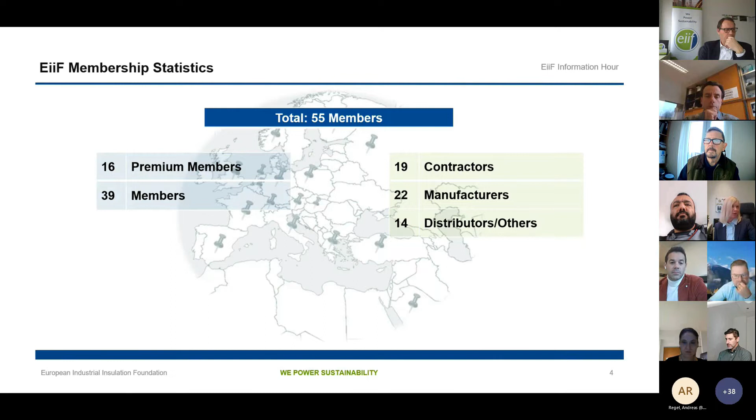Thank you, Minna. I will make it not too long, but especially for newcomers, maybe it's a good idea to go a little bit into the setup, why we are here and what is our purpose. The EiiF was founded about, I think, 12 years ago, on the idea to get this group that Minna just showed, with contractors, manufacturers and distributors, together in one organization, and with that get a voice also in Brussels and give support for the national associations. So that is basically the setup.

What we are standing for is we are a foundation, we are not an association. So a foundation has to have something - we are a charitable foundation, gemeinnützig in German. This means our purpose is not just to get the most out of the insulation business, but our bigger goal is to improve our climate by using more and better insulation. So we are a climate improvement foundation, and our means is the more and better insulation.

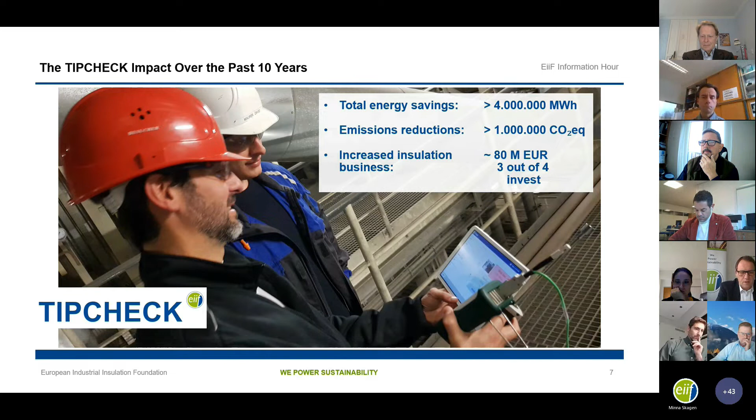Increased insulation business is very difficult to estimate, so we are careful with it, but more or less 80 million euros can be expected has been invested in realizing after TIPCHECK audits what has been proposed. Companies have invested in insulating what has been uninsulated, repairing what is damaged, and here and there maybe even upgrading the system. So that is the delivery on this.

TIPCHECK engineer statistics: we have about 92 TIPCHECK engineers today from 25 countries and 31 EiiF member companies. The next training course is planned for spring 2022. If you're interested, be fast, we have a long list of participants waiting for the date so we can organize it. We are hesitating a little on how early we can organize it due to the COVID situation, but we want to publish it as soon as possible, the soonest possible next year.

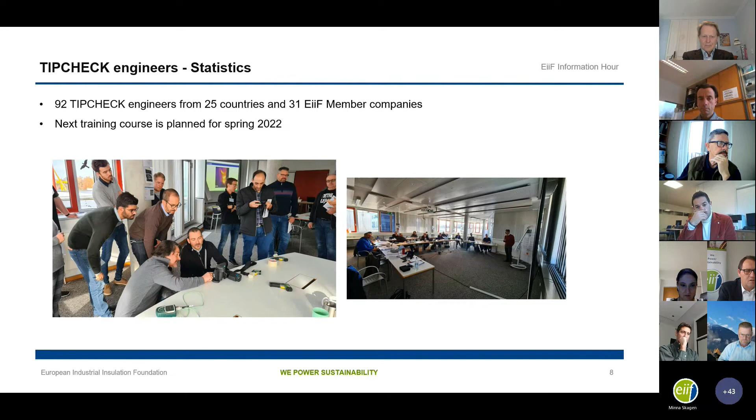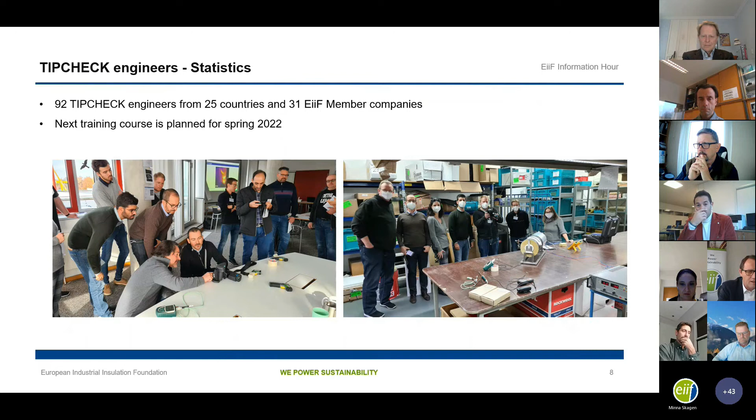What you see here is of course some theory with Luis, and there's a lot of practice. We look into infrared technology, and we do in FIW laboratories check on different kinds of materials. The device you see here is actually a heated pipe where we compare different kinds of measurements from thermographic cameras to heat flux meters, and what the influence could be, what the pros and cons of the different technologies are. Here in the laboratories, we had to respect some COVID rules.

And then finally, after one week, if people are successful, I see Laura laughing. This is fantastic, I was on LinkedIn and we like it very much. The 3 TIPCHECK engineers from Knauf were very good and very successful, and I hope you will be very active as TIPCHECK engineers in the future.

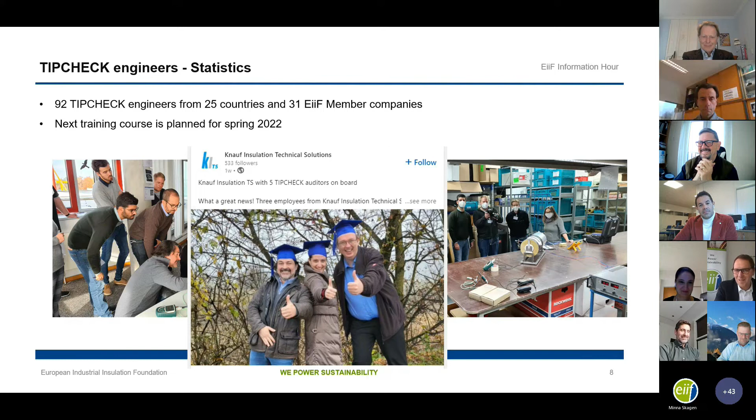Very nice idea, we need to invest in these hats. I think it was Silke's idea, our treasurer, a fantastic idea, thanks very much for that. And you can see everybody in the end is quite happy and proud.

So here you see the new faces, and congratulations to our new TIPCHECK experts who participated in the training 2021.

The workflow of a TIPCHECK, we have simplified it to make it easy, and the stream workflow here is in 4 parts. The most difficult part still is the first one, the preparation and the acquisition, so to win the client for the TIPCHECK idea and to make him pay for this qualified engineering service is still, let's say, the biggest barrier.

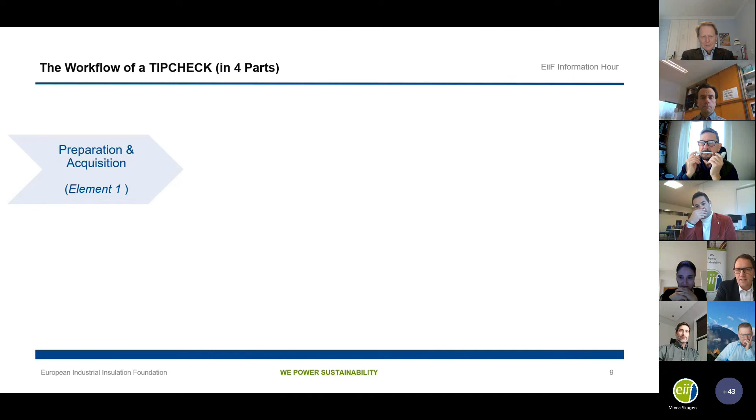If we jump over this barrier, the next step is the TBI inspection: collecting data, inspection, checking for uninsulated valves, flanges, damaged cladding, damaged insulation systems, maybe insulation systems which can be improved, and we determine the savings potential. This means, using the TBI app, you inspect the plant for 6 hours, you collect about 60 components, and you can tell your client immediately after this inspection that his savings potential, let's say, is between 50 and 60,000 euros per year.

This gives the client a clear idea of the savings potential size. Of course, it could also be only 5 to 6,000, or it can even be more, like 100,000. But let's say you estimate it between 50 and 60,000. Then the client knows: if I invest 120,000 euros in remediating all the issues, my payback time is 2 years; if I invest 150,000, it's more like 3 years. Like this, we have a very quick analysis and evaluation of the TIPCHECK activity.

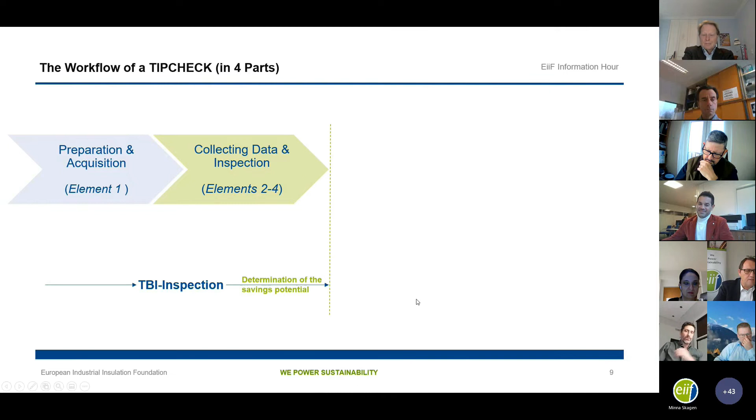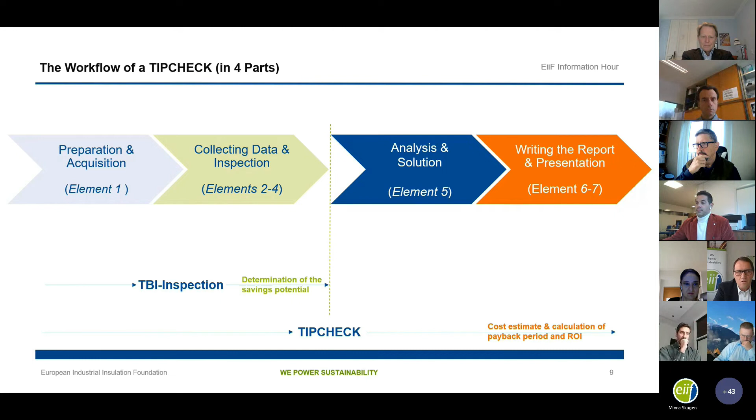The real TIPCHECK starts after, when we need to show the client how to solve the problem: what material, which thickness, what cladding material, do you need supports, whatever you have to use. There, the company can give a proper price, write the report, make a presentation with an offer to do the installation, and the client gets the cost estimate and can calculate the payback and return on investment. So this is the simple 4 steps of how the TIPCHECK is carried out.

To support this, we have produced a lot of tools. Being forced to sit at the desk has increased efficiency in doing these kinds of tasks. The TIPCHECK calculator, of course, is the basic tool, which is very nice to compare different scenarios. TIPCHECK Creator Viewer, I will show you in a second, is to show very quickly to the CFO what's in it for him. The TIPCHECK Estimator will be presented today.

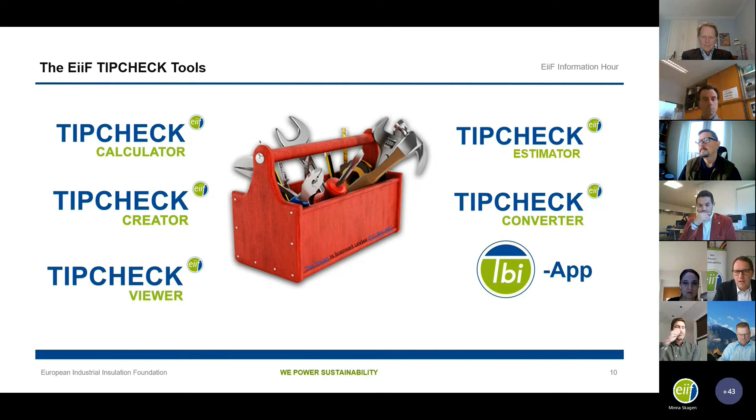It's a brand new tool, not finished in production yet, let's say in the programming, but Luis will show you the idea as such. The TIPCHECK Converter is a nice online tool to convert units, and the TBI app I will demonstrate in a minute. Starting with the TIPCHECK Converter, you see the annual energy savings potential identified by the EiiF study is 14 MTOEs, million tons of oil equivalent, which is the unit used by Odyssee-Mure, and the European Union.

But of course, we all more think in megawatt hours. So this is 160 million megawatt hours, or 40 megatons of CO2. You find this on our website, and you can do comparisons of different units, as many as you wish. Just as information, it's free. Whenever you need to recalculate in different units or know the CO2 emissions, go to the website, to the TIPCHECK part, and then in tools you will find the TIPCHECK Converter, where you can easily convert.

Okay, thank you, Andreas. Take a breath, some water. I'll do.

As Andreas was presenting, we have simplified the workflow for the TIPCHECK, and the idea is to align the tools with this new workflow. He also said that the more critical part is the acquisition. So we were thinking about tools to support this phase, and this is how we ended up with the TIPCHECK Estimator, which gives you the opportunity to estimate, using the average values from our study, what the energy losses and potential savings are in an industrial plant.

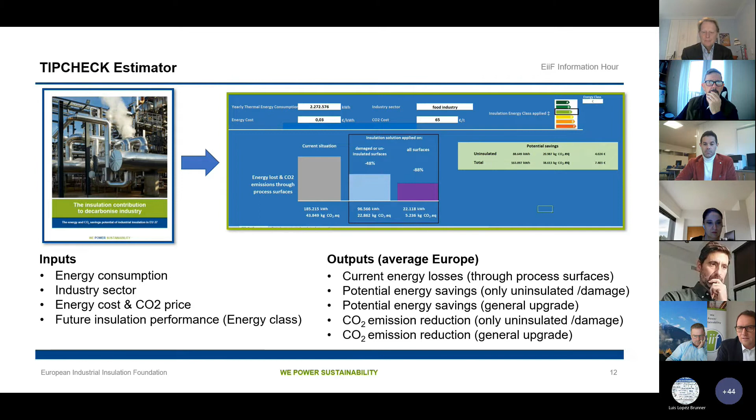We think this is going to be a very powerful sales tool, and we need to think how and where to integrate it best, also to avoid misuse. That is where we see the danger. Maybe it's just for TIPCHECK engineers, because we know they understand well enough what thermal energy consumption means and what the different aspects are. But this is still in discussion. We will have a board meeting in December where we will discuss this in further detail, and where the TIPCHECK Estimator will be made available. For sure, we can already guarantee today that for TIPCHECK engineers it will be available, included in the annual license. So thanks, Luis.

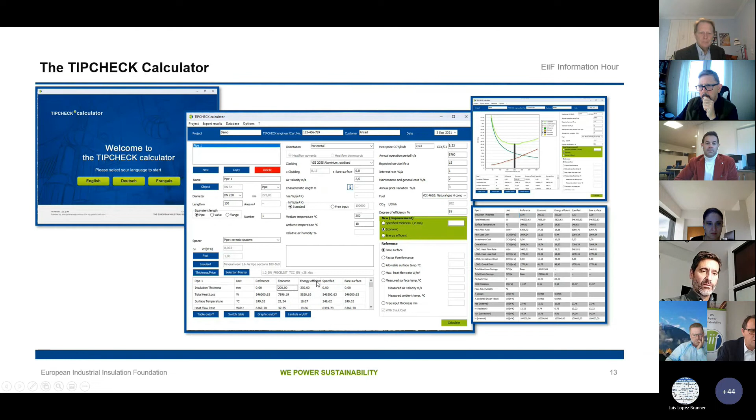Fantastic job also here. This is the TIPCHECK calculator. I won't go into more detail, the TIPCHECK engineers know it. For those considering becoming a TIPCHECK engineer, just to give an impression, you have all information on one screen, and you can compare different scenarios, from an economic insulation solution to an energy efficient one, to a specified one, and whatever else you want to do.

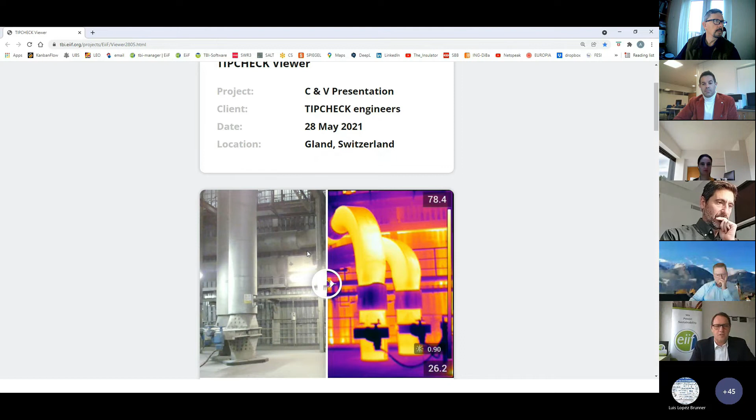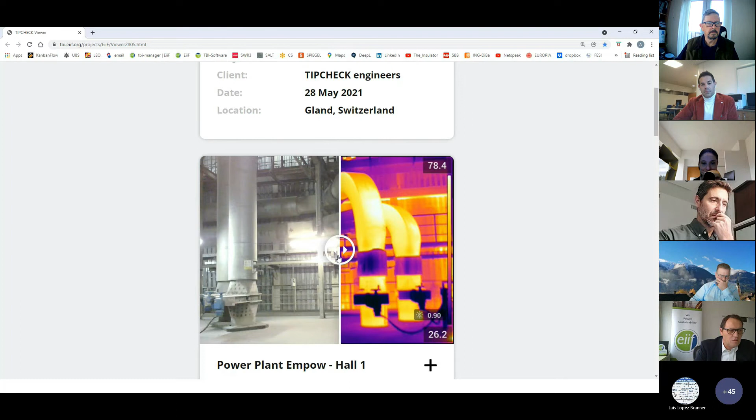And like this, you can send a link. You can also do it password protected. You send the report like this, even on a mobile phone, to the CFO having some dinner and not really interested in industrial insulation, but he will understand that for him the plant looks perfectly okay, but with the infrared image you can show that there is definitely something going wrong.

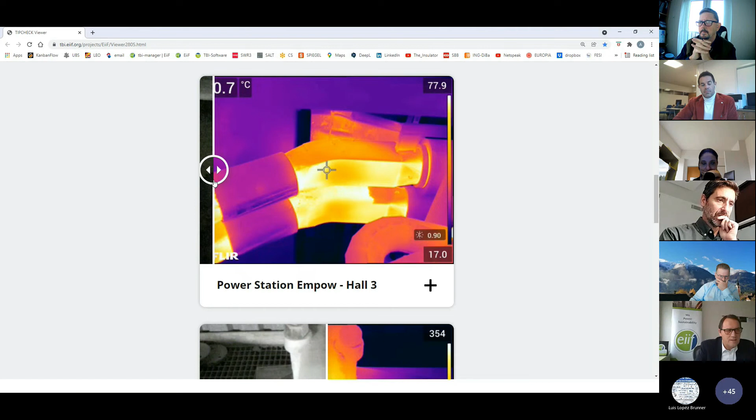The major information, and of course you can add some more pictures here. Look at this, it looks quite okay, but then if you look with the infrared, you see that something is going wrong here. And here he gets a nice summary. The savings potential is 3,000 megawatt hours, for example.

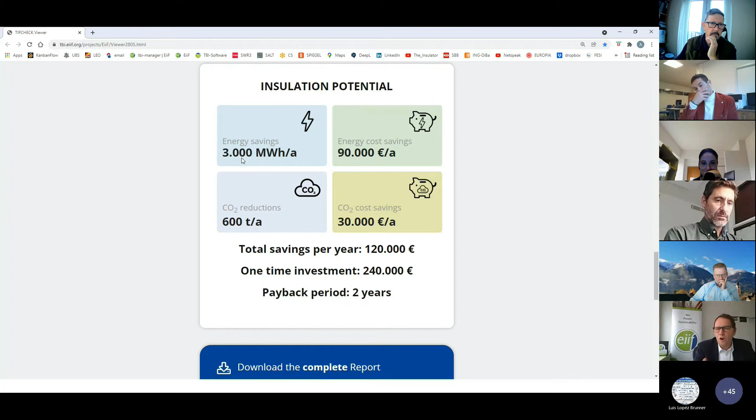This is just an example, of course. The energy cost savings there is 90,000 euros, 600 tons of CO2 reduction possible. Savings there is 30,000 euros. So total savings per year is 120. Your offer is 240,000 euros. Payback period is 2 years. You can attach the complete TIPCHECK report here.

Here are some, you can use a nicer image maybe, but I wanted to keep it a bit funny. Put your own contact details and like this, send it to your client.

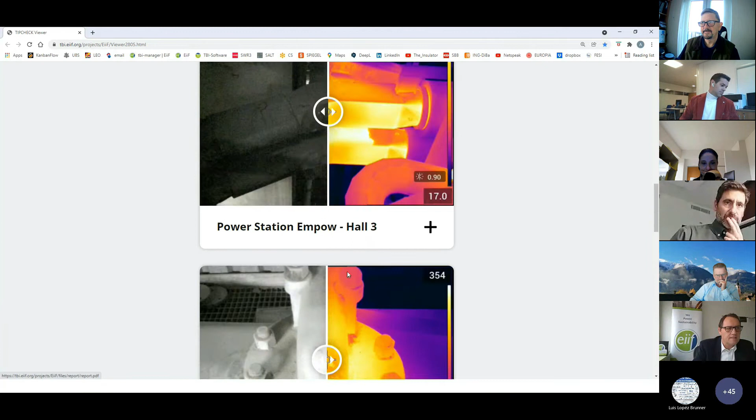And we have had quite some nice success with the tool in our last TIPCHECK at NIPRO, because the energy manager sent it like this to the CFO, and 10 minutes later he told him, go, go, go, let's do this. So it works very well.

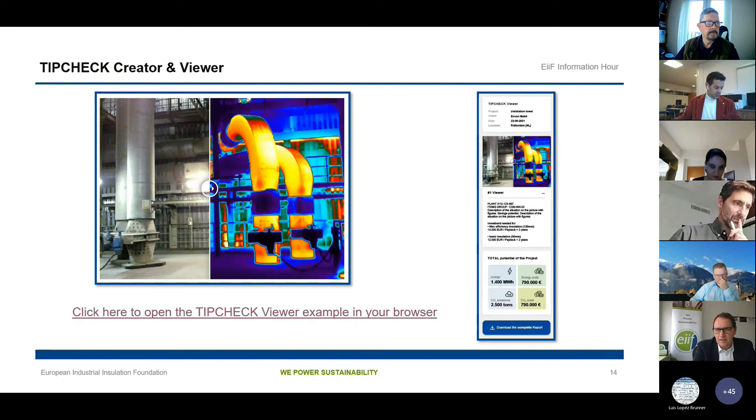We encourage all the TIPCHECK engineers to make more use of it. So don't hesitate, don't be shy, go back to us. And we're always happy if something is unclear, of course. This can be nicely trained in online trainings. Okay, that's the TIPCHECK creator and viewer.

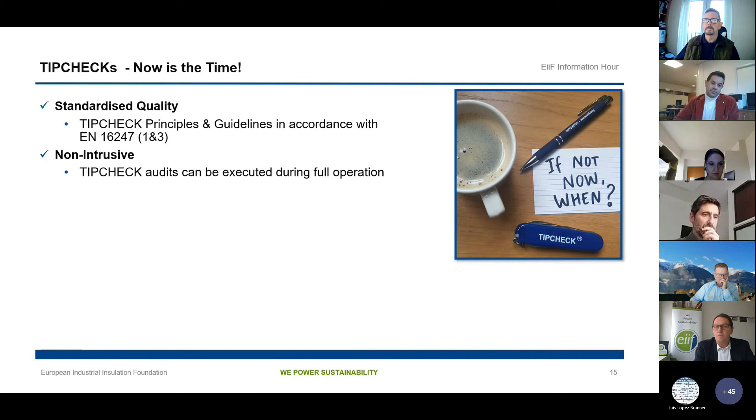In principle, looking at TIPCHECK and the development demand from the market, we think now is the time. So the last 10 years, we collected a lot of experience. We did 2,500 TIPCHECKs in total, about 600 in industrial and 1,800 in the building equipment sector. And we see really the standardized quality builds a lot of trust. It's non-intrusive, so the TIPCHECK itself must be done in full production, otherwise you will never identify the hotspots.

Therefore you should even execute it at full operation. Many insulation solutions afterwards can also be carried out and they don't have to stop the plant. If they have to, it's usually better to wait until the next turnaround. It's cost attractive and affordable. The payback for all these projects on average was 2 years, sometimes it's a few months.

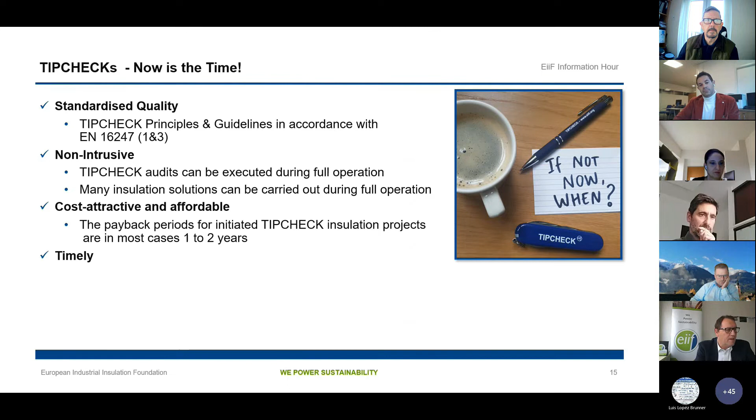It's very timely now with the Fit for 55 decarbonization, getting to 55% in 2030. The whole climate issue, of course, contributes to standards which exist and which are implemented more and more, like the energy management standard ISO 50001. So you can use it there. And it helps for the energy audit obligation, former Energy Efficiency Directive, Article 8. In the new recast, this will be Article 11, but maybe this is too much detail now.

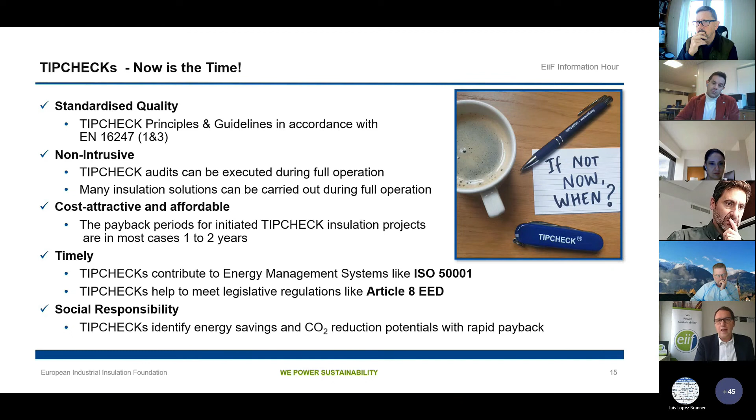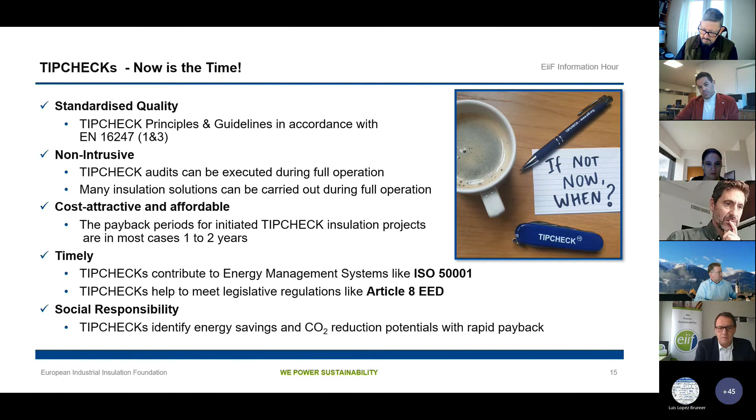And of course, doing TIPCHECK services and offering TIPCHECK services, I think shows the social responsibility also of insulation companies, that you are actively offering services which help industry to reduce energy consumption and emissions. And of course, for industry itself, besides being a cost reduction tool, they see the benefit there, doing more than what they did in the past, let's say, to produce energy efficiently.

So it's very timely. Why is now the time? Energy prices are going very, very high. Why is that? One of the reasons is that the raw materials are getting scarce, and I think all of you experience it now. Think about cladding material and getting enough for the next project. And the other thing is, of course, the price for CO2 - I took the German figure from yesterday evening. So you see here that it was at 69, and it's incredible how much it goes up and down.

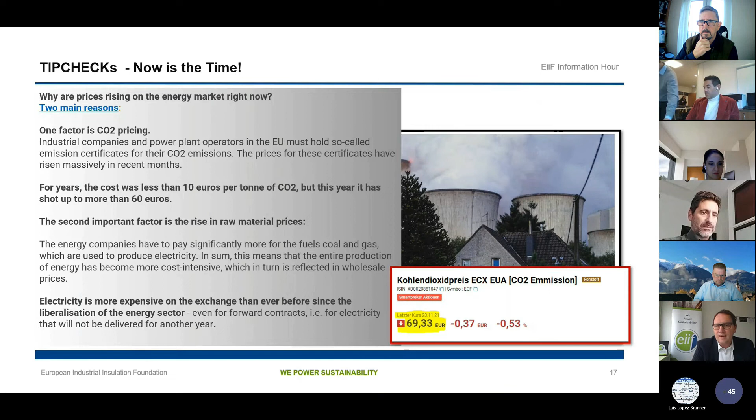Just a quick political update. Yesterday, the German traffic light coalition has shown the contract of the coalition. And they have agreed that the price for the CO2 ton should not go below 60 euros. So this is restricted and wanted by the government, a declared goal that this price should never go below 60 euros again.

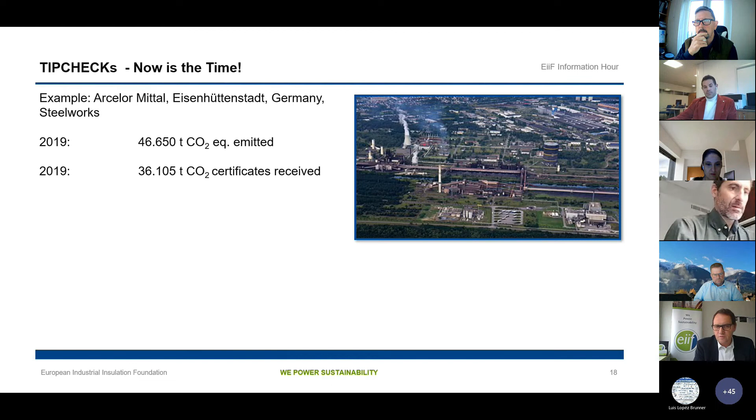Let's take one example: a steel producer in Germany, having certificates for about 36,000 tons of CO2 per year. So for this he doesn't have to pay, but he produced 46,000 in 2019. The difference is about 10,000 tons of CO2 equivalent.

Before, with a CO2 price of 5 euros, he paid 50,000 euros - was peanuts, didn't matter. Yesterday's cost was 25 euros, 260,000 euros, already more. But now we talk about more than 500,000 euros, which he has to pay for the 10,000 tons of CO2 equivalent he emits more than he's allowed to.

And let's not forget, the certificates he receives for free are reduced every year. So the share, if he doesn't do anything, the share of tons where he needs to pay will increase. And this is a significant cost.

And we see from the market that TIPCHECK clients, where companies did the TIPCHECK some years before, are now coming back to the insulation contractor or a manufacturer, asking for an update of the insulation specification, because they look into every production step: do we emit in this production step? If yes, can we reduce it? And in this process, I think we have an open window of maximum 2 years where we can put insulation on the table.

And explain to the installation users, this is a technology which is very easy to use, can be implemented directly into your system and process, and will help you reduce emissions and pay back itself very, very fast, especially compared to other energy efficiency technologies.

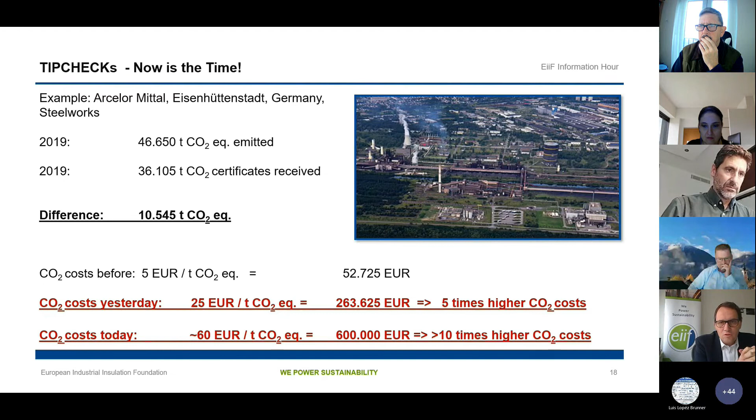Peter said we are quite successful in Brussels, and here we are not just successful, we are really proud. The Commission actually quotes our TIPCHECK services in the evaluation of the Energy Efficiency Directive. The EiiF's vast TIPCHECK experience shows that improving insulation saves money, energy, and reduces CO2 emissions, offering short payback periods and a high conversion rate. 75% of TIPCHECKs lead to insulation investments.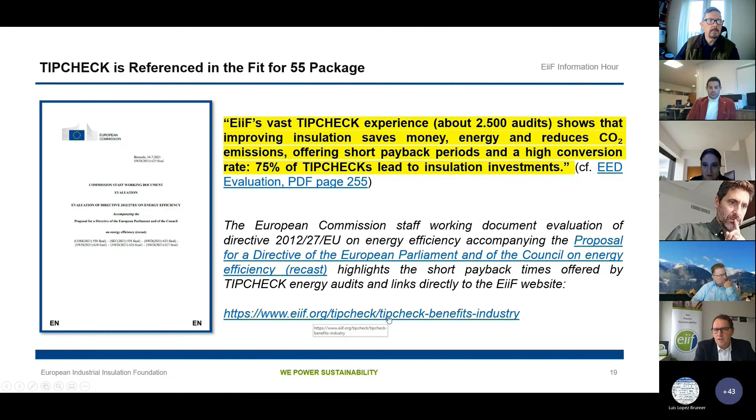So this is, of course, fantastic, and we build on this and we work on it. They even link to our website where we show the benefits to industry. So the work we've been doing continuously over the past years does deliver some very nice results and puts TIPCHECK high on the agenda, which was one of the tasks we had when we started.

We have a new format of TIPCHECK Ambassador trainings. I know it's a lot of information - we are recording this, so if you need to see one or the other again, just go to the recording. But what we see, and we really feel the need, is that next year we all have to be really active. We have to use this open window of opportunity.

And we have had a pilot organized with Saint-Gobain Isover and the German sales team. And we have found, I think, the perfect match for sales marketing people, the TBI app, and TIPCHECK knowledge.

So we train how to use the TBI app, how to convince a client immediately inside the plant, standing in front of an uninsulated valve for example, what's in it for him if he orders a TIPCHECK service and then insulates better. The time effort is 4 hours.

Investment for the company is 1,500 euros. We can organize it at the location which is best for you and your employees, and that's the deal. We hope to organize a lot of these ambassador trainings next year with our members so that we can really push a positive wave to swap over Europe with TBI inspections and TIPCHECK promotion.

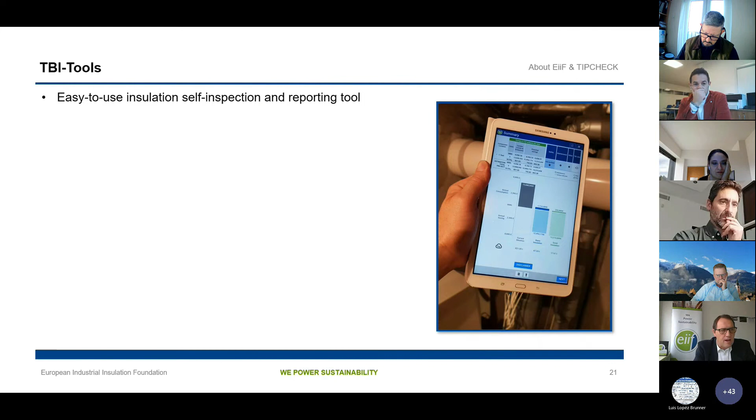The TBI tool - I will make a very short presentation here. There's a link to a live tutorial where you can see how to use it. It has been downloaded more than 1,000 times from Google Play on Android devices, and about 600 times for iOS Apple devices. The app is very easy to use, and I will quickly demonstrate if that works technically.

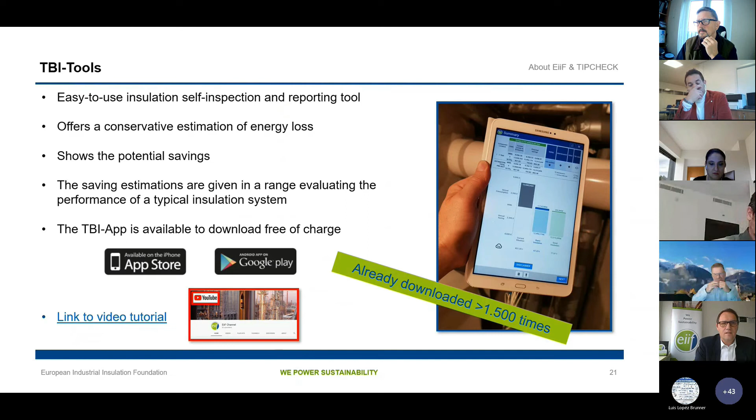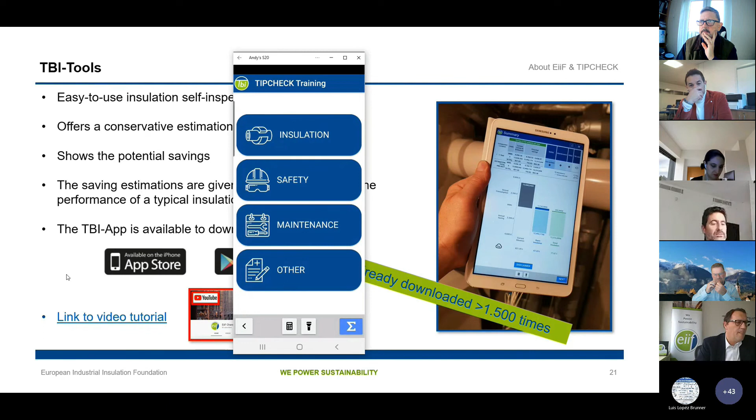Let me check, everything is prepared, like in a cooking recipe. But now the window doesn't want to move to the right. Come on, to the right here. Okay, to the right window. I'll just make it big like this. So in the TBI app, you have the chance - sorry, let me go to the next slide and tick this on again. Okay, perfect.

So what you can see here is you're inside the plant, looking at this pipe where the insulation is missing. So you're actually running an insulation project. You click on insulation, on uninsulated, you choose pipe, and then for the component location, you type in the name.

So pipe, I'll just do it now very quickly. You choose the operational time, which is all year long. The diameter is DN600, so we take 610. The surface temperature is 250. We measured that. The ambient temperature throughout the year average, let's say, is 15. You take the picture.

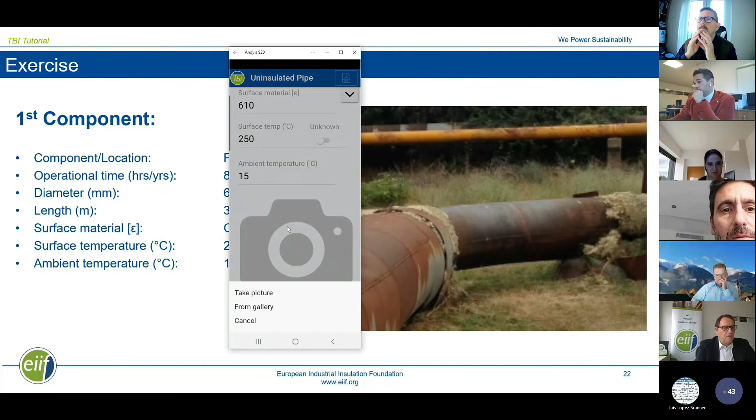Oops, okay, not this one. Let me go back. Okay, if the picture is okay, you turn the phone again.

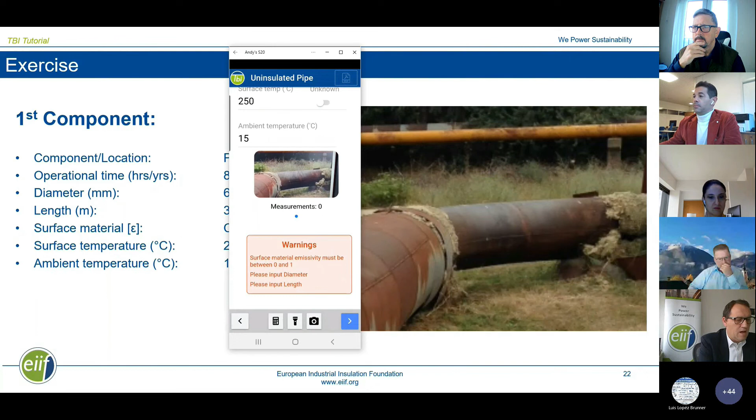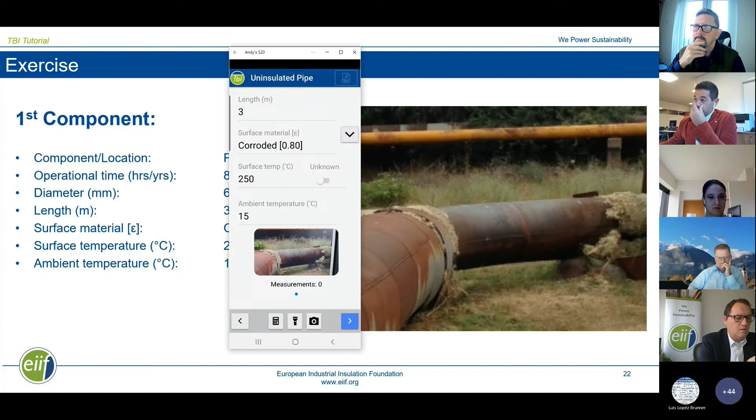I forgot the emissivity and the length. Okay, sorry, so the diameter went out. The length is 3 meters. Surface material is corroded. So now it should be fine. Pipe, operational time, diameter, length, corroded, 250.

Tack. You can choose if the medium temperature is a liquid or a gas. Let's go for the liquid. And then you click on next, and you see here already the result. These 3 meters are losing between 6,000 and 7,000 euros a year.

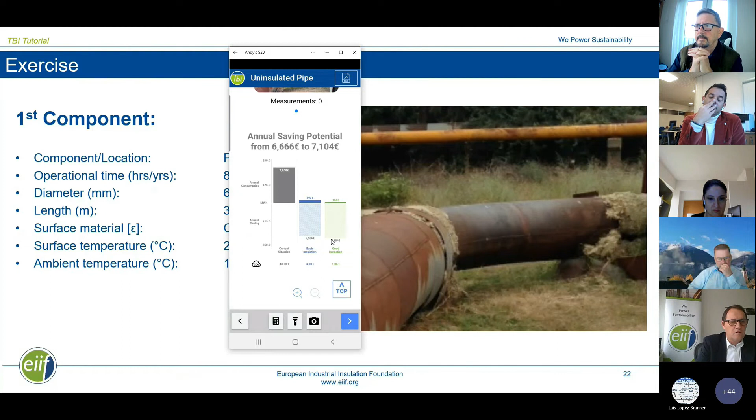You see here the current losses. You see the savings potential for a basic or a good insulation system. And you can click on the top on the PDF, and you get immediately the report if you choose the right tool to use it.

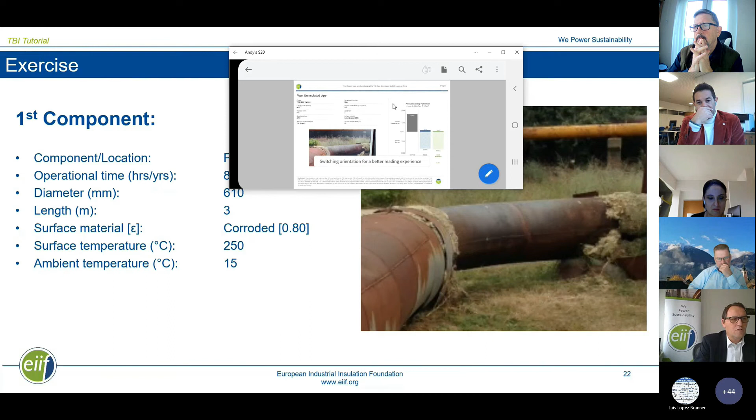And you can hand this, send it by email to your client, and like this, just to make it big and get rid of my phone. You have the result which you can present and send immediately to your client, so he understands what the problem is.

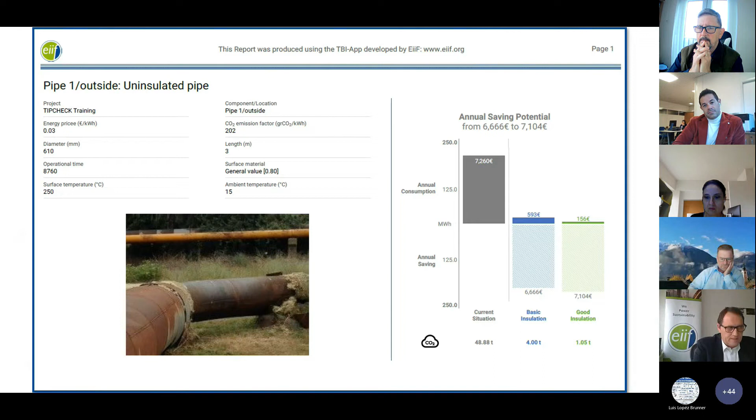So on advocacy we did some publications, and you find all of this on our website in the publications area. We have the Fit for 55 package, decarbonizing industry, the study, fact sheets per country, the white paper. A lot is there that you can use for your own internal marketing, or if you're an insulation user, to be informed about the potential.

On the advocacy work, I'll just pick out COP26, actually, so far as we have heard from Brussels. There was an agreement to lower carbon. There was unfortunately not the agreement to completely get out of it due to India, but it won't affect the decision from the European Union, which has decided until 2030, 55% reduction, until 2050, Europe should be decarbonized. So there's no bad impact from there. There are some positive impacts, but we don't have the time to really go into detail there.

One of our last activities was that for the new Energy Efficiency Directive Recast, we filled in the public consultation with feedback from EiiF.

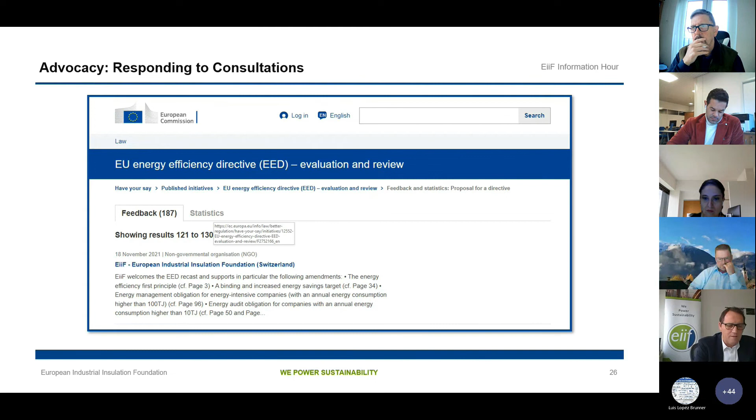Here we see the most important new parts of this revised Energy Efficiency Directive, one of which is the Energy Efficiency First principle, a binding and increased energy savings target. We can discuss with the new figures if 36% is enough or 40 would be better.

Energy management obligation for companies above 100 terajoules annual consumption. We checked, and all our mineral producers fall under this, so they all produce more than 100 terajoules per year, or they use and consume more energy than this. So this is also affecting our own membership, and it's a good limit to get the energy intensive industry to act and implement energy management.

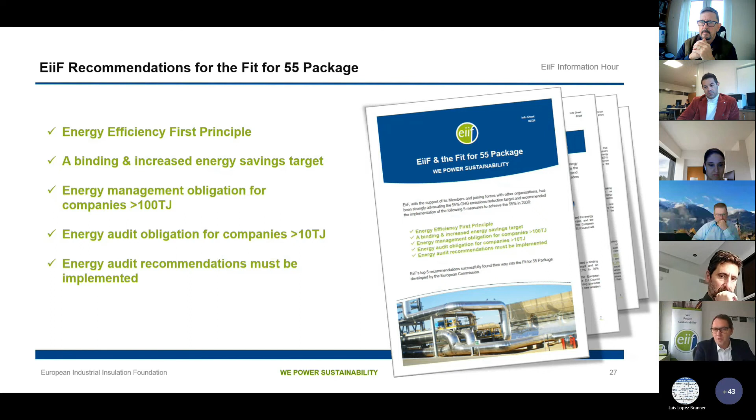Companies with less, between 10 and 100 terajoules, have to do an energy audit every 4 years. There we are promoting the idea that within those 4 years until the next audit, any measure with a payback time of less than 3 years has to be realized, which of course would be a big push for insulation and makes complete economic sense for the asset owner. If those recommendations by the audit are not implemented, there should be some punishment, and we are also promoting this idea to make it clear.

And that gives me another break and brings me to Christian to quickly demonstrate what our National Resilience Recovery Plan project in Team Austria has delivered so far. So Christian, the floor is yours.

I will just let me know when I shall skip the slide. Okay, thanks a lot, I hope you can hear me all.

Well, it's really breathtaking what Andreas is telling to all of us. I must say, we are really pleased about the excellent support that we are getting. And this is about the cooperation between EiiF, the Association of Austrian Insulation Companies, and our activities.

We have been active in springtime to directly connect to the Austrian Minister for Climate Action, Leonore Gewessler, and she responded in a very positive way, so we could directly connect to sub-organizations like Klimaaktiv, which is the organization that makes things happen.

So we had a seminar with Andreas and Andreas from Knauf Insulation, very successful, with great feedback on the TIPCHECK and the TBI app. We have prepared, I'll show on the next slide, a fact sheet on technical insulation based on the material that EiiF has prepared.

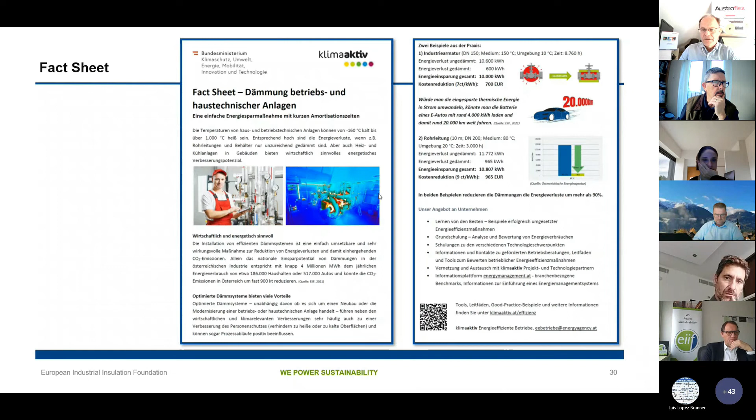So we have a very nice dynamic, and you see it's really delivering and pushing things in the right direction. So a lot of fun there. We have other countries being active, but unfortunately we are running out of time and don't have time to go more into detail here. I will therefore do it very quickly to give Luis a chance to report at least a little bit about hydrogen, and maybe we'll have to add an extra session to talk about it in more detail.

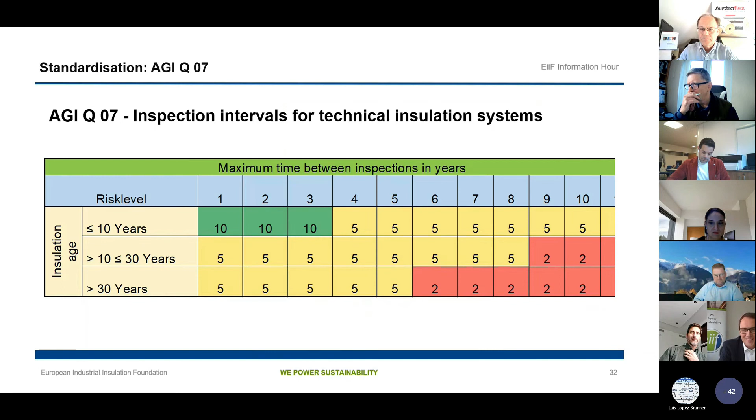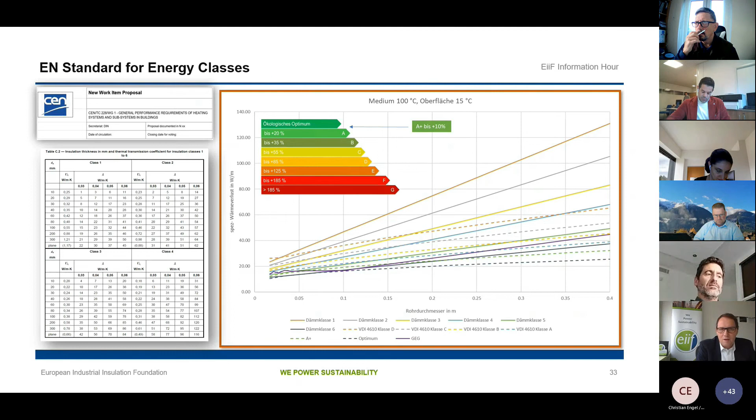So inspection intervals, I said it at the introduction. Peter said all about the importance of the energy classes. You saw it even in the TIPCHECK estimator. We need them, and as I said before, hopefully in February we will have this open ballot positively voted, and we can start and call in for experts.

And that directly leads me to Luis and hydrogen. Luis, I don't waste any more words, you take the presentation.

Okay, so first of all, we won't have a lot of time, so don't hesitate to come back to me if you have any question after the short introduction that I will do.

The idea is that now hydrogen is very trendy and we are all becoming a kind of expert in the energy sector with all these prices for energy, etc. So the idea was to try to understand what is going to be the trend for the future and how it's going to impact insulation. I was reading a lot of information and trying always to have the perspective not about the technology itself, but about what is going to be the impact for insulation.

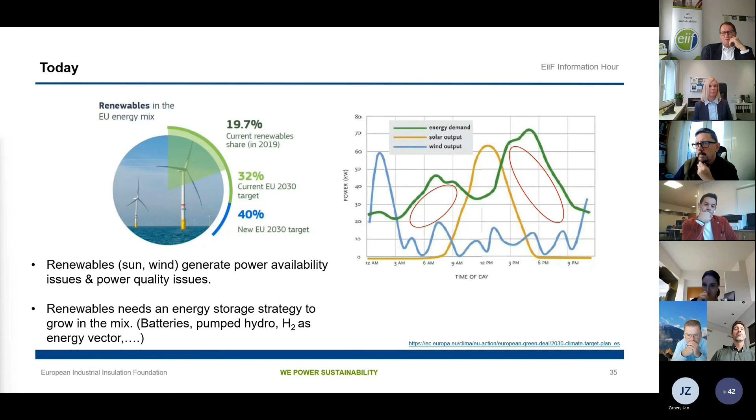And that's where hydrogen will play an important role as an energy vector. It won't be the unique solution - there will also be batteries, pump hydro, etc. But for sure hydrogen will be part of it, and that's why the EU is putting a lot of effort to develop this technology.

Today, hydrogen is basically produced from fossil fuels, which means it emits a lot of CO2 - that's also a problem. It's a problem because the use of hydrogen, not linked to energy but linked to ammonia production, petroleum refining, methanol, etc., will increase in the future because of new regulation in transport and also higher pressure on the food supply chain, increasing demand with huge pressure to reduce CO2 emissions.

So there we will have a problem, and that's where there is already a solution with a technology called carbon capture storage technology, which basically reduces the emissions of CO2 to the atmosphere.

There already is an opportunity for insulation, because not only is the process to produce hydrogen done at high temperature, but the carbon capture technology also requires medium temperature, around 150 degrees. So there will be a lot of insulation involved. This is something that is not yet there, but it will come because of this pressure to reduce CO2.

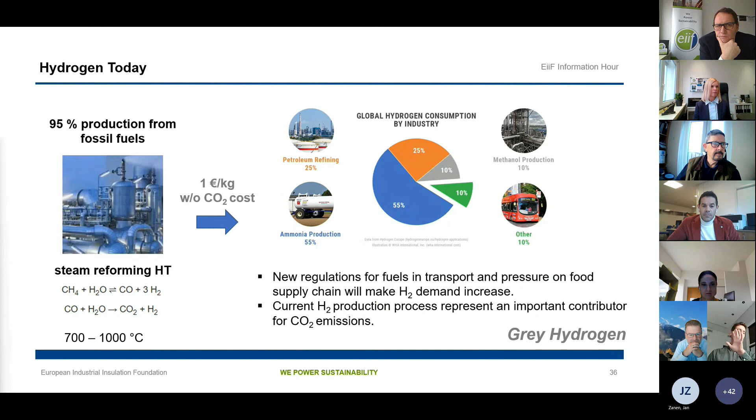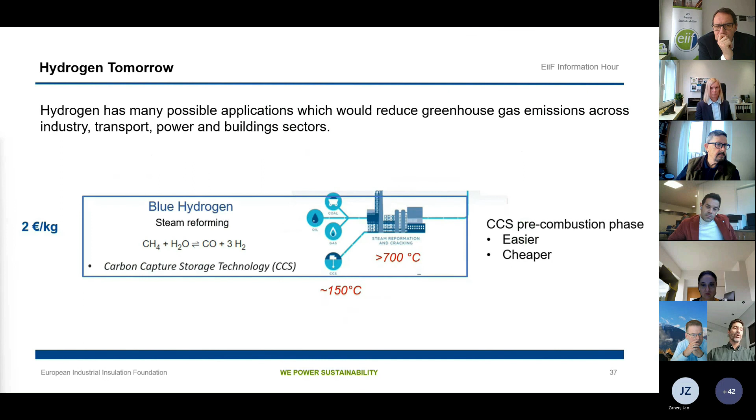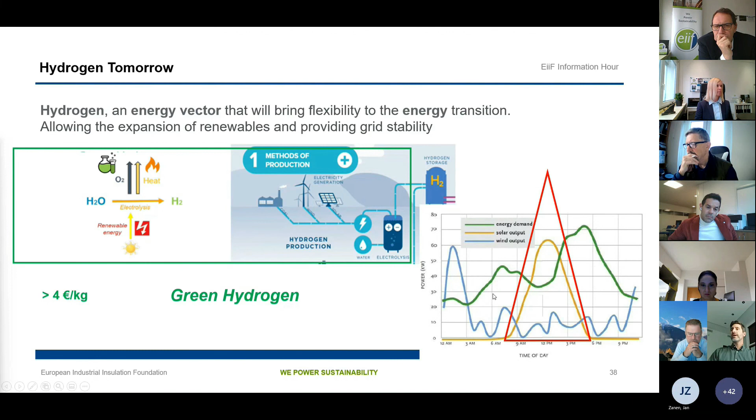So let's sum up quickly: we have gray hydrogen which comes from fossil fuels, and today is used in industrial applications. To reduce the CO2 emissions of this hydrogen from fossil fuel, we can use carbon capture storage technology - this is what's called blue hydrogen. Then we have green hydrogen, which will allow us to use hydrogen as an energy vector, increasing the production of renewables and moving this peak to the areas where energy demand is higher. How is this going to impact insulation?

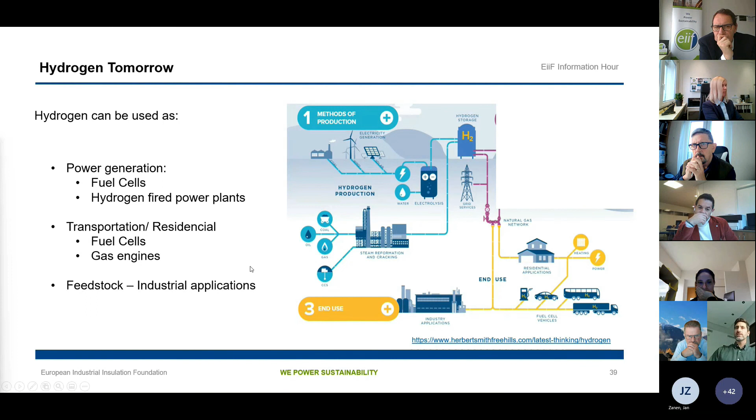If we think that later on, with this hydrogen produced from electrolysis, we can generate electricity again to be used in these areas - for this we have two different technologies. One is fuel cells, so it looks like this, and basically we do the inverse process.

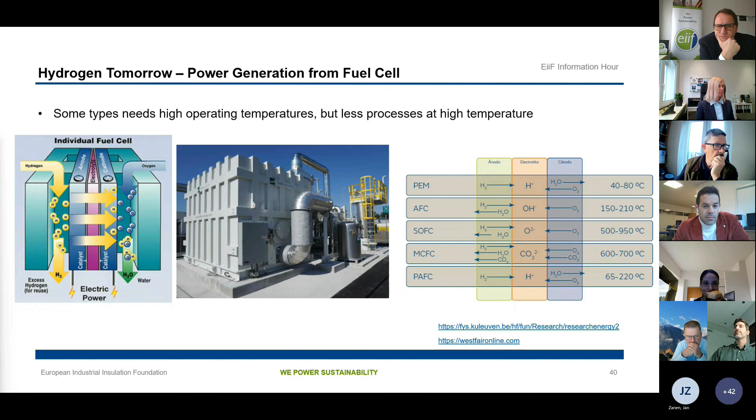So from hydrogen, we produce electricity, and there are some high temperature processes involved. But of course, the amount of insulation needed there is lower than what we have today in a normal power plant. We can also use the hydrogen back in the normal fired power plant.

So it can be used in combination with carbon and natural gas, or just as hydrogen. Of course you need to do some small adjustments in your plant, but the idea, as shown in the chart, is that you produce energy with renewables. The peak of production not required by demand can be used in an electrolyzer to produce hydrogen, and then this hydrogen can be converted back to electricity when required, for example during the night.

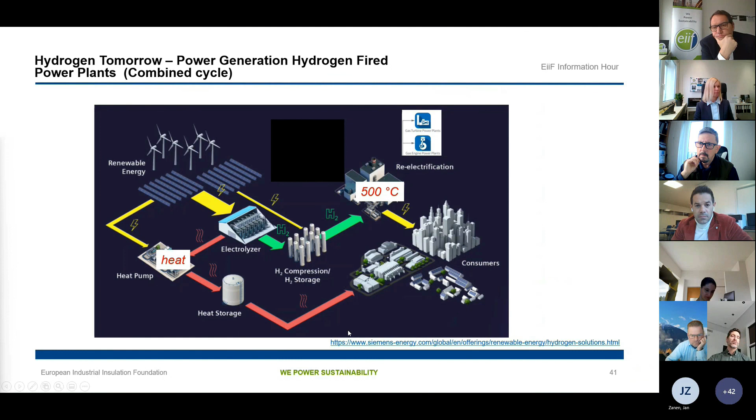And here we will have exactly the same demand for insulation that we have today in a natural gas power plant. In addition, there will be use of the heat produced in this electrolyzer process, which will ideally be recovered with some central heating installations where insulation will also be involved. And then to finalize, we have the transport part where also insulation is involved.

Insulation can be involved if we transport the hydrogen as a liquid at very low temperature, and there are a lot of new technologies that will pop up combining different materials, including vacuum as a material. It can also be transported by converting the hydrogen into ammonia, to be able to transport it as a liquid at ambient temperature. In this process, converting it into ammonia and converting it back to hydrogen involves temperature, so insulation will be involved there too.

So all in all this can sound not effective at all, and actually it's not effective, but it gives an opportunity to reach the challenge of 40% production from renewables, and also to reduce CO2 emissions. Different technologies will pop up, but this pathway will definitely develop. And I think from the insulation point of view, we are not going to suffer. It's not like if energy comes entirely from renewables, insulation will disappear from production, because we have this alternative that will still require some insulation.

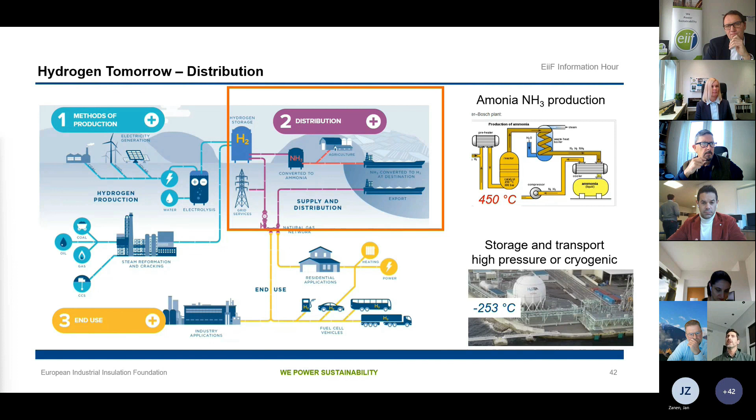Perfect, Luis. Then I'll take over. Thank you very much, Luis, for this short introduction, and sorry that you had only very little time. We're just too active, we do too many things.